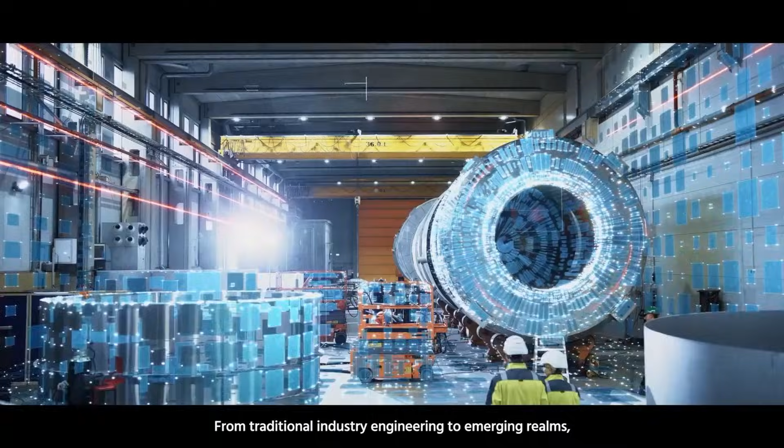From traditional industry engineering to emerging realms, from home appliances to heavy equipment, Bodor delves into the world of lasercraft. The brightest light shapes the dream from heart.

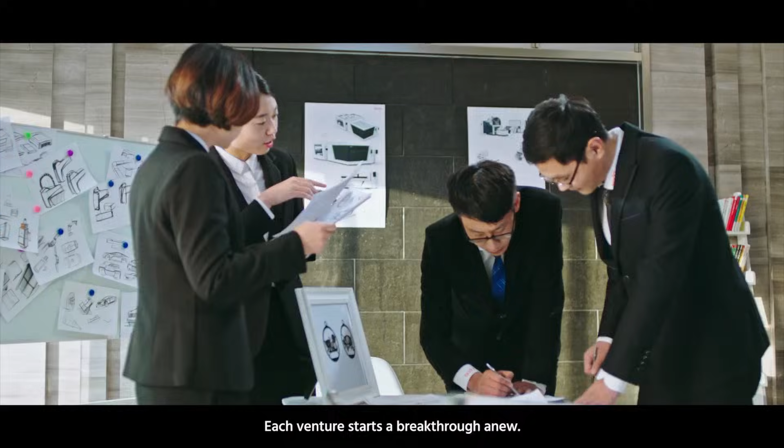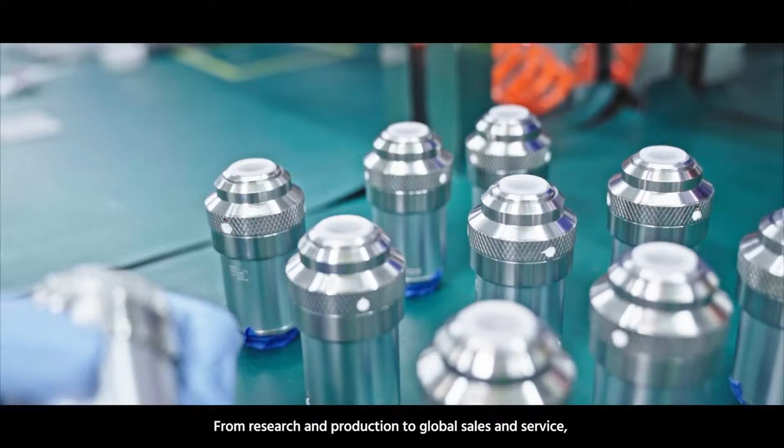Each venture starts a breakthrough anew. Since Bodor's inception in the laser industry, its course has been destined to infuse life and change. From research and production to global sales and service, Bodor focuses its strategy on laser cutting and welding machines.

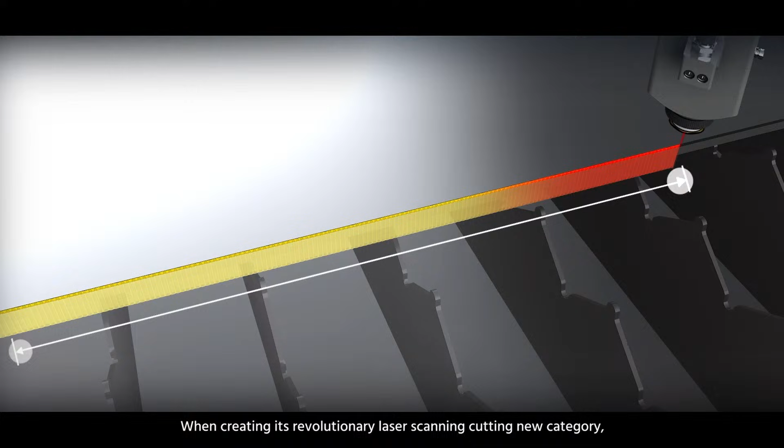When creating its revolutionary laser scanning cutting new category, the pioneering spirit on innovative technology takes the stage and brings fresh opportunities for industry growth. With multiple top global awards, Bodor's design is acclaimed, continuing to lead the industry trends.

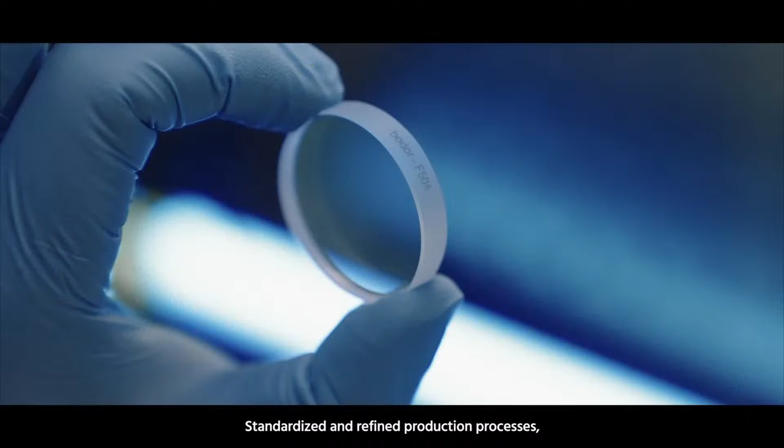Each stride pushes excellence forward. Through focused research on core optical components, the high-standard clean workshops achieve dust-free production of laser heads and laser sources. Standardized and refined production processes, along with quality inspection procedures, ensure consistent product performance.

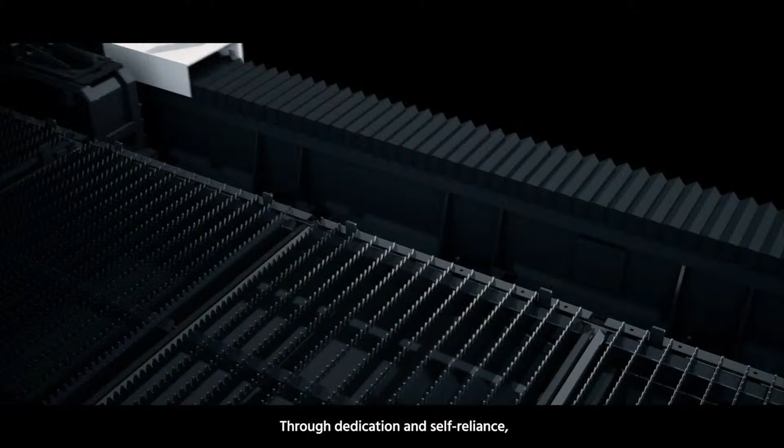Through dedication and self-reliance, Bodor leads in building a laser ecosystem with 6 self-developed core technologies. Through innovation and change, Bodor is always a step ahead.

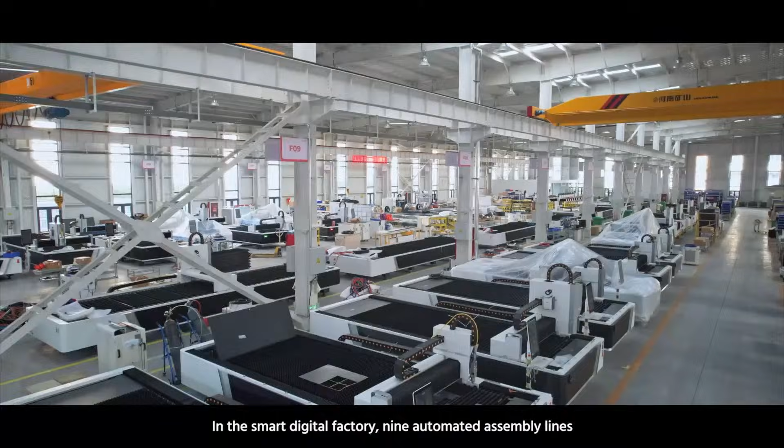In the smart digital factory, 9 automated assembly lines achieve standard and efficient production, delivering 1 Bodor laser cutting machine every 10 minutes.

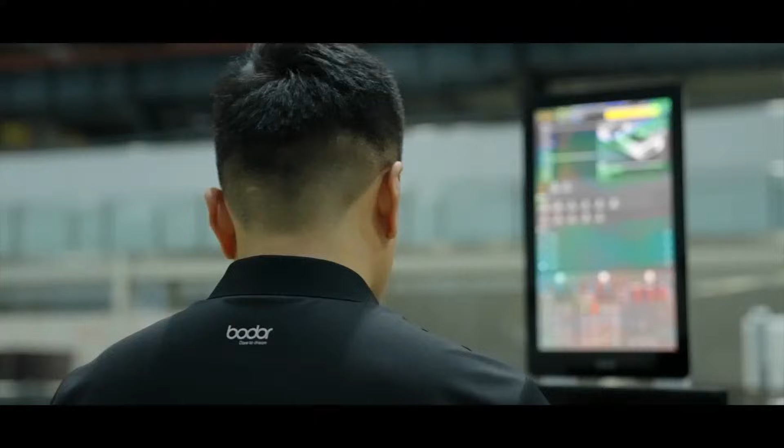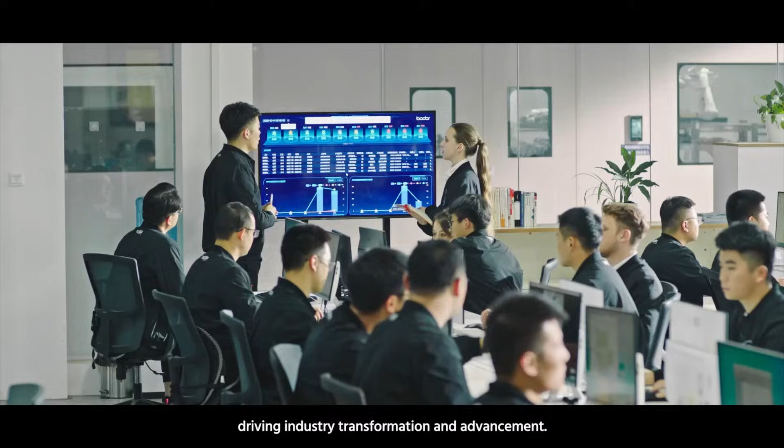Supported by world-class intelligent manufacturing systems and stringent quality management, Bodor is committed to offering top-quality products with no defects, driving industry transformation and advancement. At Bodor, craftsmanship and intelligent technologies make the excellent quality a consistent performance.

Bodor Laser Machine cut all the Tokyo 2020 Olympic and Paralympic symbols on the victory ceremony podiums. Each step aims towards tomorrow's best.

Bodor's global approach and high-level European standard attract top talents from around the world. In 180 countries and regions, its footprint reaches to hundreds and thousands of customers' plants to fulfill Bodor's belief in

paramount service. Bodor is committed to establishing a global service network. This ensures quick response times and professional service for global customers.

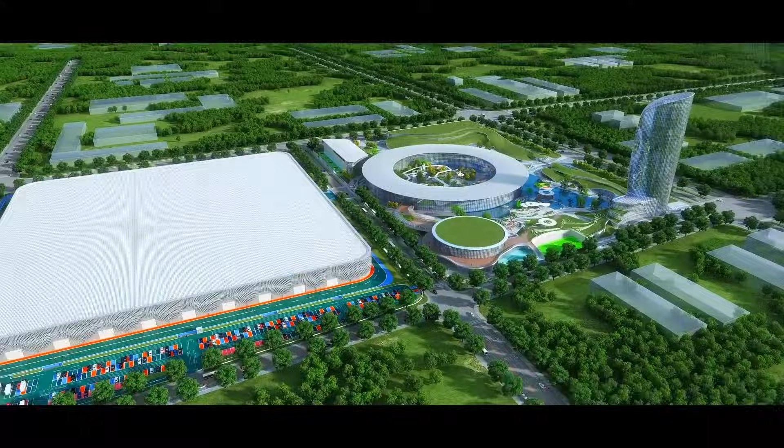At Dream Park, the future global headquarters of Bodor, spanning 300,000 square meters, a gathering place of diverse...

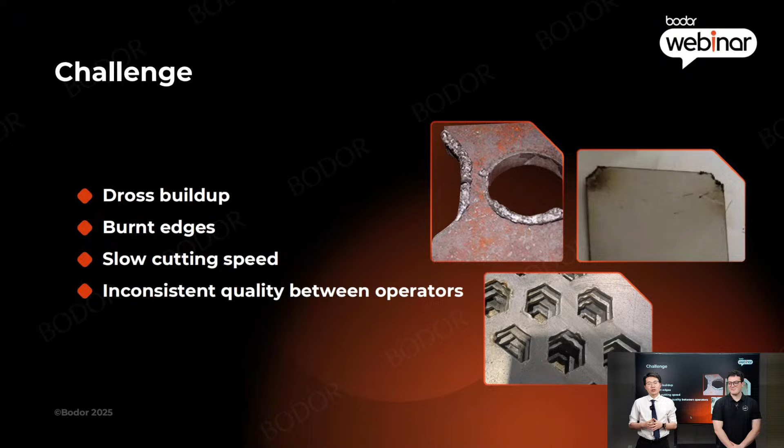So today we are going to fix everything up. We are going to break everything down, what really affects your cutting results, and how to dial in your settings step by step.

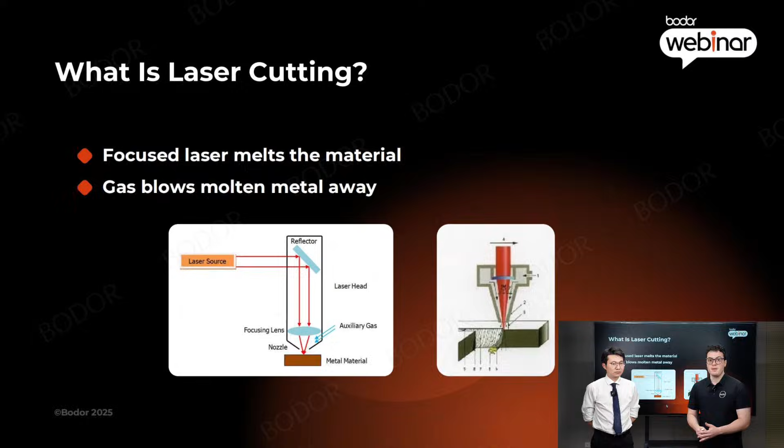Yes, sure. Imagine a laser beam as a tiny, ultra-precise blade, but made of pure light. When that beam hits the surface of the metal, the temperature jumps to 2000 degrees in a fraction of a second, and the metal melts or even vaporizes exactly along that path. At the same time, a high-speed jet of gas blows the molten material out of the kerf. That combination, intense light plus high-speed gas, is what gives you that clean, accurate cut.

Okay, so basically, the laser does the heating and the gas does the cleaning, right? Yeah, exactly. That laser gives you precision, and the gas keeps the edge clean and smooth. And because the beam never physically touches the metal, there is no tool wear and no mechanical deformation the way you might see with traditional cutting methods. That's very amazing, laser is like a blade made of light, right?

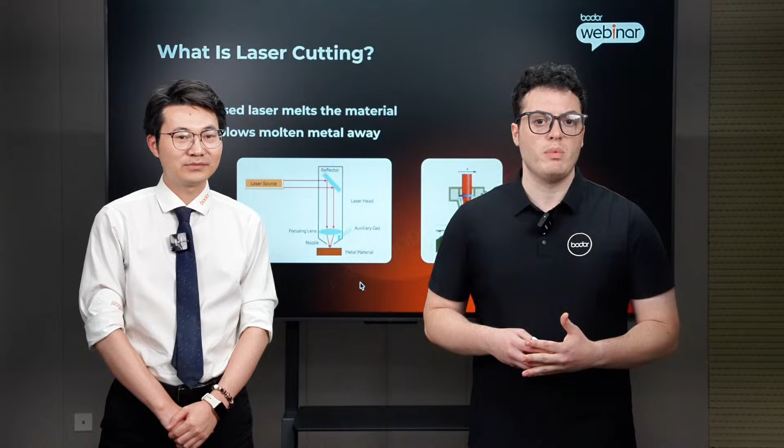Let's look at the two main types of laser cutting. Yeah, I remember fusion cutting and also oxygen cutting, right? Yes, let's start with fusion cutting. That's where the laser melts the metal, and nitrogen or clean air blows the molten metal away. Since the gas doesn't react with the metal, the cut surface stays clean, shiny, with no oxidation. Got it, perfect for stainless steel, aluminum, and titanium.

So what about oxygen cutting? Oxygen cutting, on the other hand, works almost like adding a flame boost. The laser preheats the surface, and then oxygen reacts with the hot metal. The reaction releases extra heat, and that extra heat helps the laser cut faster through the metal. Okay, so oxygen basically makes the cutting faster.

And it's like giving the laser a turbo boost, right? Yes, that's why oxygen cutting is ideal for carbon steel - fast, efficient, and low gas cost. You can cut stainless steel with oxygen too, but the edge will be darker and rougher because of the oxidation. So in most cases, we still recommend oxygen mainly for carbon steel.

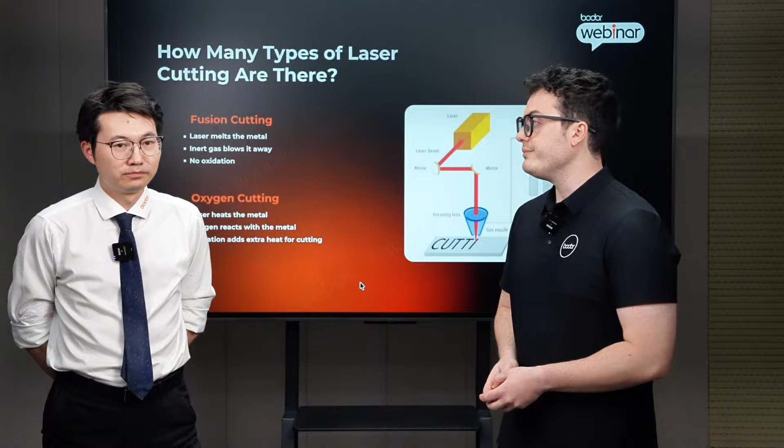To sum up, oxygen for carbon steel and nitrogen for stainless steel and aluminum. Yes, that is the key difference. Okay. Now let's move on, from how it works to how you control it.

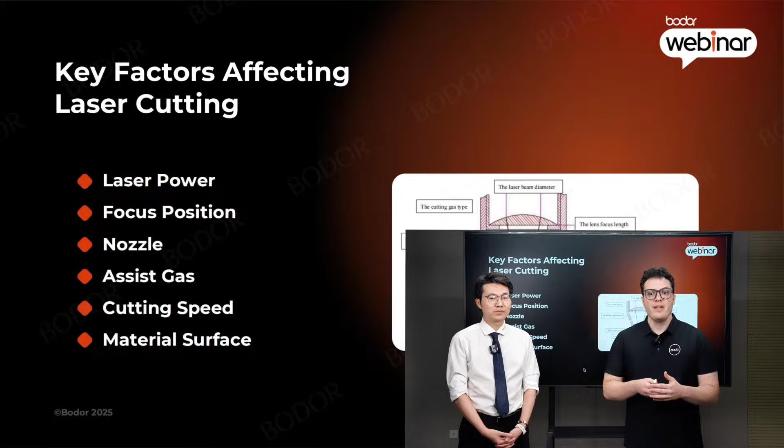The cutting parameters - first up is laser power. Laser power is simply how much energy you deliver into the metal. Take a look at the screen.

On the left, you can see what happens when the power is too low. The beam does not fully press through, and you end up with an incomplete cut. In the middle image, the power is too high. The metal overheats, the kerf becomes wider, and the edge turns rough and over-melted.

On the right, you see the result when the power is set correctly. A smooth, shiny edge with no dross.

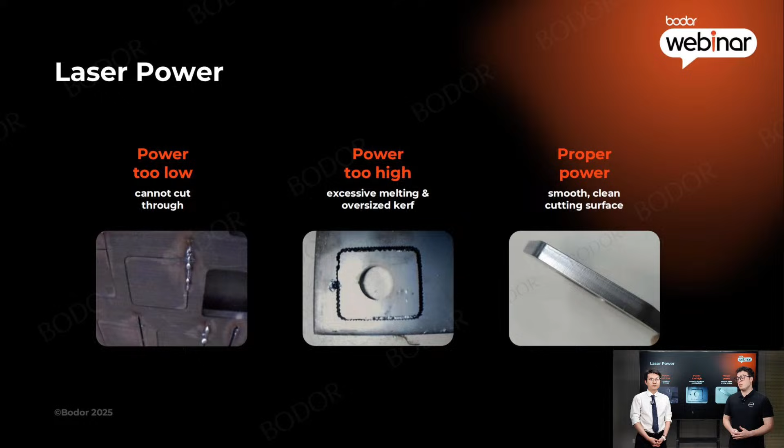Oh okay, I got it. And after power, I guess it's focus, right? Yes, the focus decides where that energy is concentrated inside the material. If the focus is too high, the energy spreads before it reaches the core of the sheet, and the penetration becomes poor. If the focus is too low, you push the energy too deep, and you can burn or roughen the edge.

That sounds tricky to adjust manually by operators. Yeah, that's why Bodor machines use automatic height following. The system continuously adjusts the nozzle height for you, so the focus stays in the right zone, even if the sheet is not perfectly flat or the thickness changes across the plate. That means less manual fine-tuning and more consistent results from part to part.

Okay, that's more convenient. And I've seen a lot of users ask about positive, negative, and zero focus. So when do you use each one? Great question. Here's the simple version. Zero focus: the focus sits right on the surface of the material. Energy is distributed in a balanced way through the thickness. This is common for medium thickness plates and gives a very stable, clean edge.

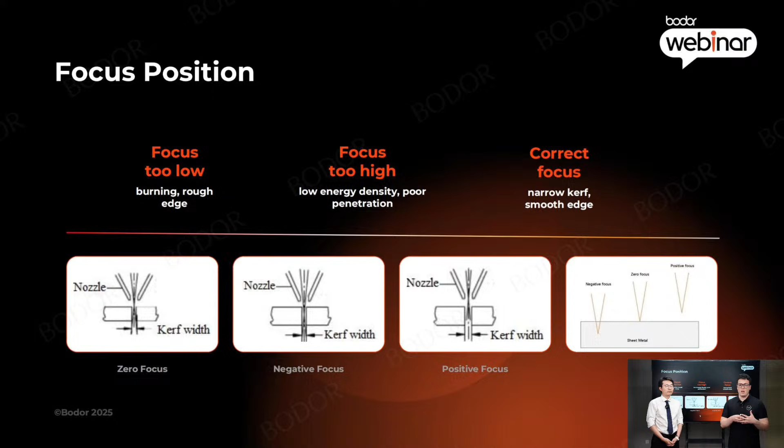Then negative focus. The focus point is inside the material. You get higher energy density deeper in the sheet. This is ideal for stainless steel and aluminum with nitrogen, giving a bright, clean edge and reducing dross. Okay, nice, but I think it's quite complicated.

I can sum it up. It makes sense, but does the focus position always change the energy density, and also change how the metal flows inside the kerf? Yes, exactly. You can think of it like aiming a flashlight, where you place the brightest spot completely changes the result.

Okay I see, that's a very good explanation. And speaking of machine adjustments, I always see operators switching nozzles and gas settings. Does this really make a big difference? Yes, a huge difference. The nozzle might look tiny, but it's critical.

It controls the gas flow that clears the molten metal. If the nozzle is dirty, worn, or damaged, your airflow becomes uneven, and even with perfect power and focus, your cut quality will suffer. And nozzle size also matters.

Yes, exactly, nozzle size matters a lot. Smaller nozzles create a faster, more concentrated gas jet, perfect for thin plates where you want a sharp, focused flow. Larger nozzles work better for thick plates where you need more volume of gas, even if the speed is a bit lower. The key rule is do not oversize the nozzle on thin sheet. With too large a nozzle, you can disturb the cut and even risk damaging the lens.

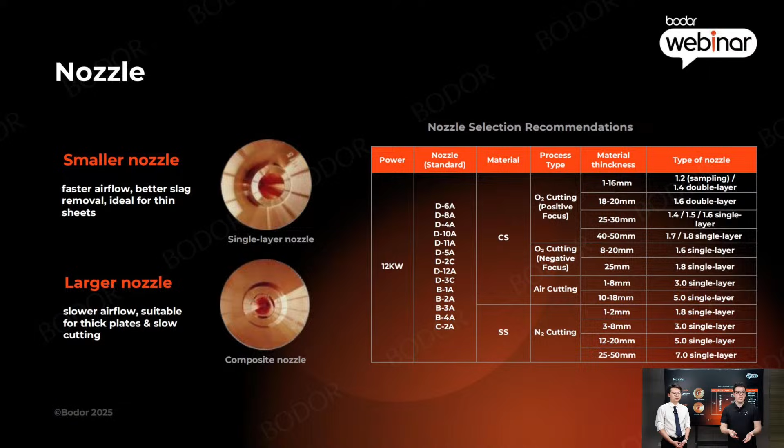So it's definitely not bigger, the bigger the better, right, for nozzle? Yes, exactly.

Now let's talk about the assist gas. It is just as important as the nozzle. For carbon steel, we usually use oxygen with a relatively low pressure for both piercing and cutting. For stainless steel, nitrogen is the common choice. And for thin carbon steel, stainless steel, or even some other materials, you can also use air.

The purer the gas, the better the cutting quality. So make sure your oxygen is at least around 99.9% pure, and your nitrogen is above roughly 99.9% if you want the very best results.

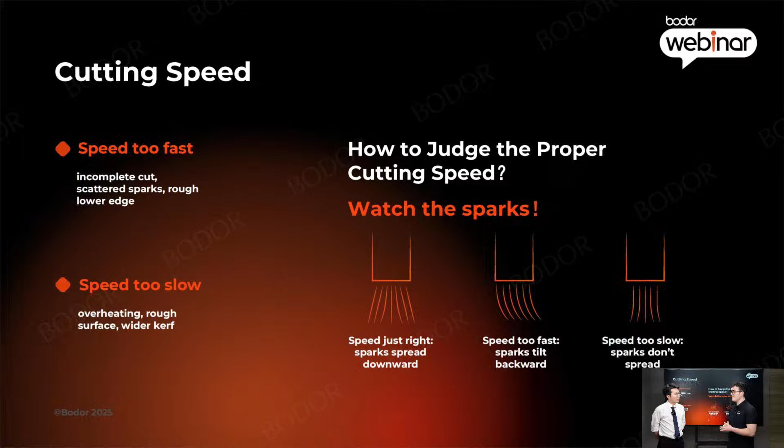The ideal situation is when the sparks flow evenly and smoothly, and the lower part of the cut has no molten residue. That is how you know the cutting speed is just right. Very good tips, very visual and practical. Thank you, Dennis. Thank you, Frank.

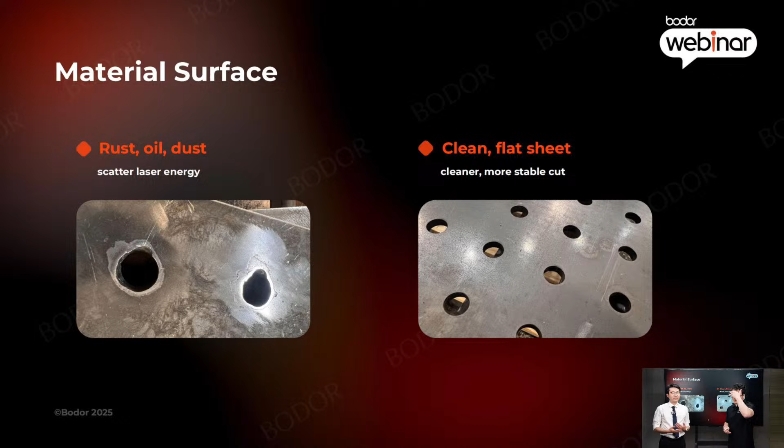And finally, remember that the sheet surface condition matters too. If it is rusty, oily, or dusty, laser energy scatters and the cut becomes unstable. So a clean and flat sheet equals a clean cut. Get all this right - power, focus, speed, gas, and material - and you will have a perfect, efficient cut every time.

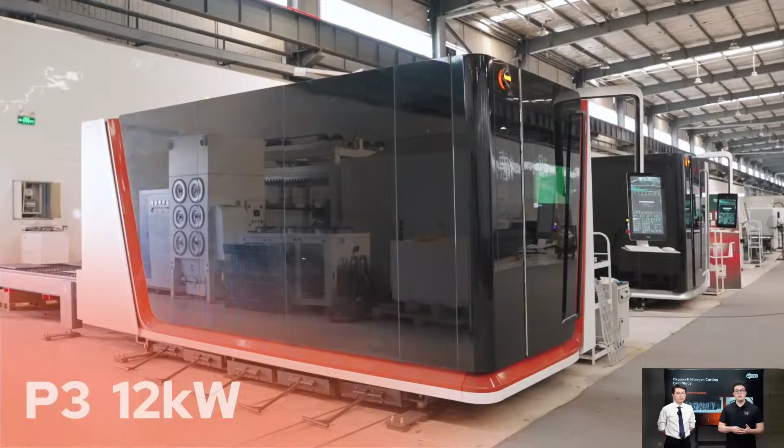And for today's live demonstration, we are using two configurations.

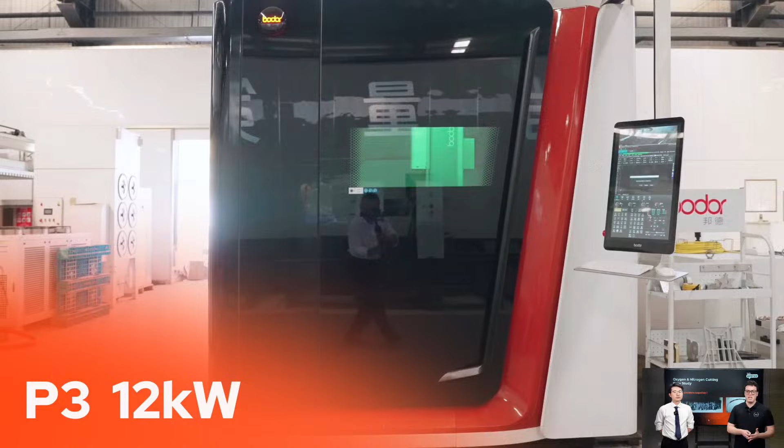For carbon steel and stainless steel, we are working with a 12 kilowatt P3. For aluminum and brass, we use a different setup.

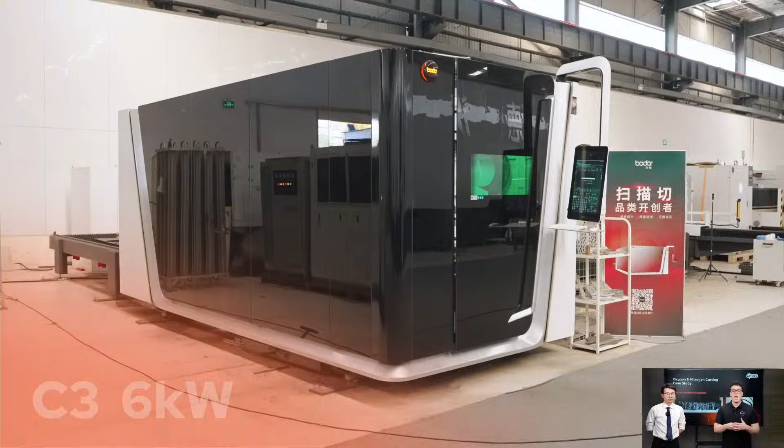For aluminum and brass, we are using a 6 kilowatt C series machine equipped with our scan cut laser head, which gives extra stability when we cut highly reflective materials like aluminum and brass. And as we go through each material and thickness, we will also walk you through the recommended parameter settings, so you can see exactly what works well in real production.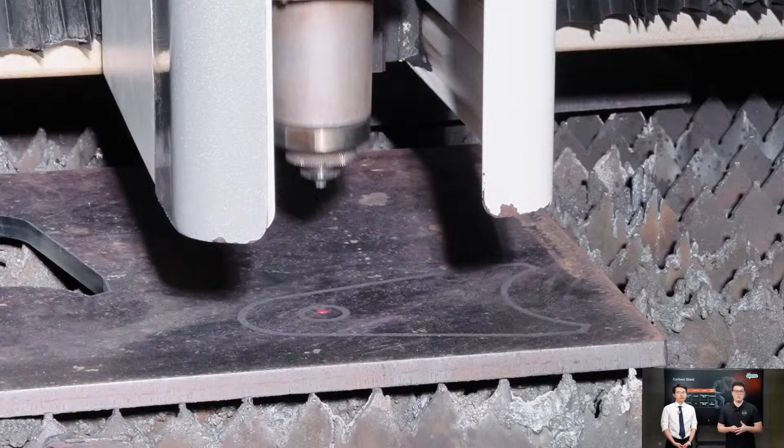Right now, what you are seeing on the screen is a 16 millimeter carbon steel plate cut with a positive focus. For this cut, the focus position is set to about plus 14. We are using oxygen as the cutting gas and a single layer nozzle with a diameter of roughly 1.4 millimeters. These settings give you stable cutting performance on thick carbon steel.

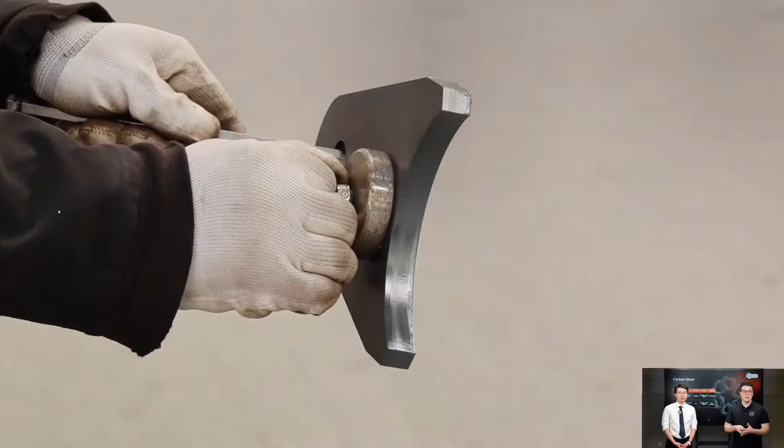Take a look at the sparks, falling straight down, clean and steady. That is exactly what you want to see. When the sparks drop vertically like this, it means your parameters are dialed in correctly. Good piercing, a clean curve, and a bright, smooth edge.

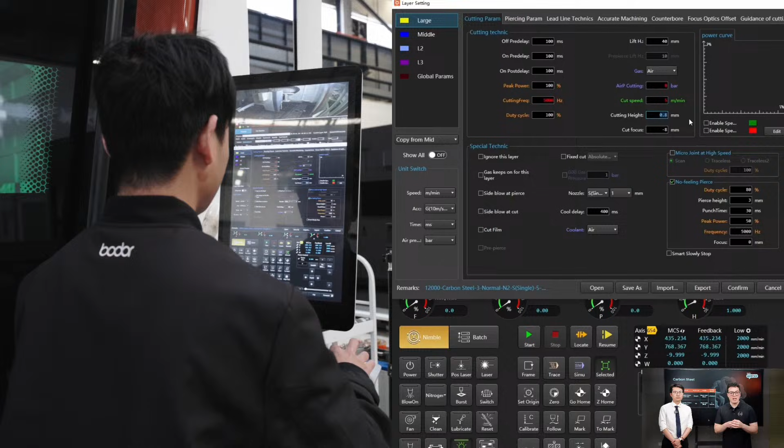Now let's switch to a thinner plate, a 10 millimeter carbon steel sheet. It is the same material, but we are changing one key parameter: the focus. Here we are using a negative focus set to about -8, and we are switching to air cutting with a single layer nozzle of roughly 5 millimeters in diameter. With this setup, the cutting speed is in the range of about 5 to 7 meters per minute.

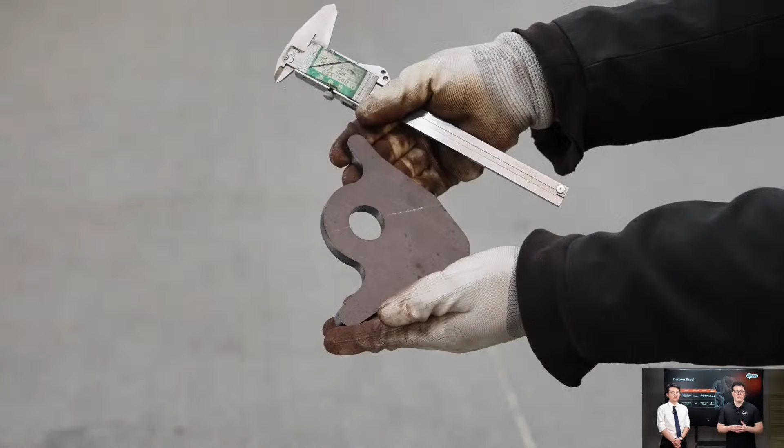Take a look at the sparks. They are shorter and more concentrated now. That is exactly what negative focus is supposed to do. By pushing the energy deeper into the plate, the molten material is cleared out faster. And look at the edge: bright, clean, with almost no dross at all. That is a very solid result for 10 millimeter carbon steel using air cutting.

Okay, moving on. Now it is time for stainless steel. I know many of you cut stainless every day, so this one is definitely for you.

We are working with a 10 millimeter stainless steel sheet, and this time we are switching to nitrogen as the cutting gas. Why nitrogen? Because it keeps your edge clean, bright, and free from oxidation. No burn marks,

No dark edges. For this cut, we are using a negative focus set to around -10, a single layer nozzle of roughly 5 millimeters in diameter, and nitrogen as the cutting gas.

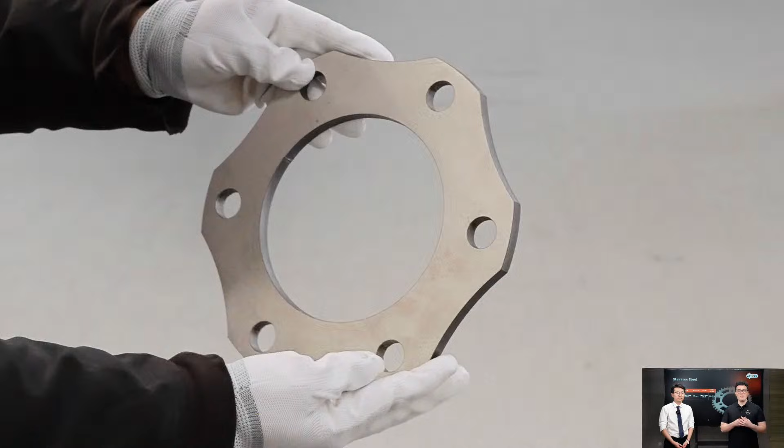Take a look at this edge. See how smooth and shiny it is? That is exactly what you want when you are making decorative panels, kitchen equipment, elevator components. Anywhere the appearance really matters. Yeah, it's very common in our daily life.

We are running at around 6 to 8 meters per minute. And if you look at the sparks, they are smaller, tighter, very controlled. That is the perfect sign of a stable nitrogen cut. It's very beautiful and looks like a mirror finish.

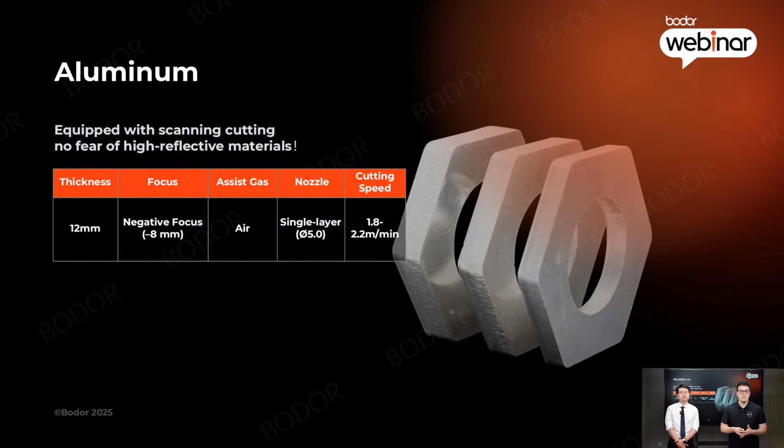All right, now let's move on to something a bit more challenging: aluminum. Aluminum looks beautiful when it's done right, but it's also one of the trickiest materials to cut. We are working with a 12 millimeter aluminum sheet, and for this demonstration we are using a 6 kilowatt C-series machine equipped with a scan cut laser head, a single layer nozzle of about 5 millimeters in diameter, a negative focus of roughly -8 millimeters, and air as the assist gas.

For aluminum, the combination of air and scan cutting is a great choice, especially because aluminum reflects a large amount of laser energy. Keeping the focus stable and the gas flow clean is absolutely critical to getting a crisp edge without burn marks.

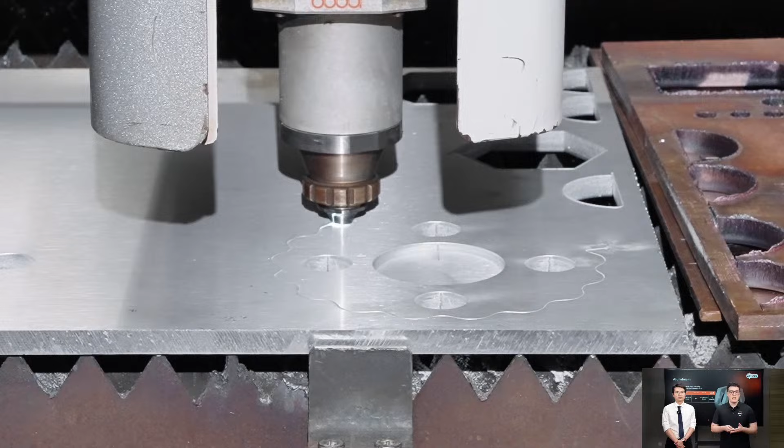Take a look at the sparks, see how they are shorter and wider? That is a sign that the reflections are being handled well. And look at the edge, bright, clean, with no burns at all. That's really satisfying to watch.

For aluminum and other reflective materials, it's common to say these materials can do very huge damage to our laser source. The scan cut laser head is technology innovated by Bodor Laser, designed to solve the problems of cutting reflective materials like aluminum. So when we combine air with the scan cut laser head, you get very smooth and bright cutting results on aluminum.

Once everything is tuned correctly, the laser basically glides through. Here's a quick tip: when cutting reflective materials like aluminum, make sure your protective lens is spotless. Any reflection or dust can throw off the beam, and that's something you definitely want to avoid.

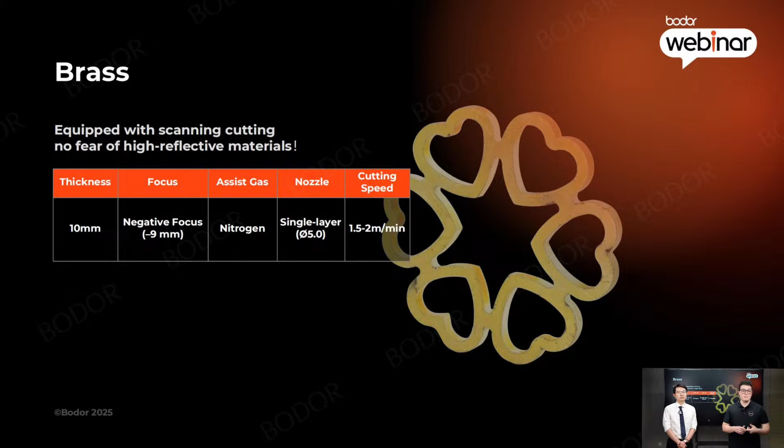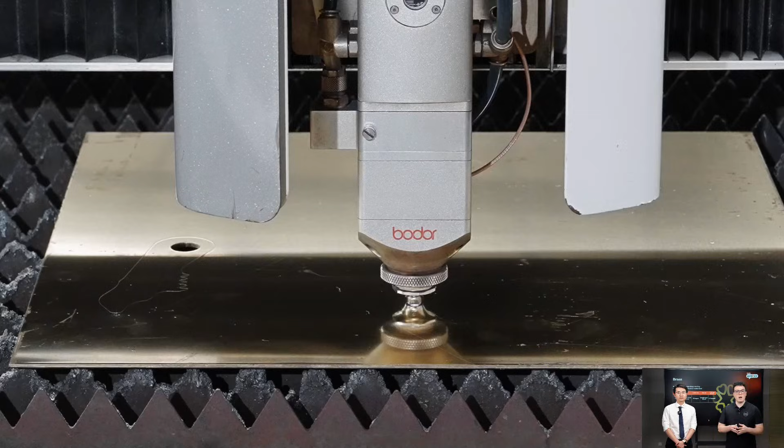This one is always a crowd favorite, shiny, smooth, and full of color. We are cutting a 10mm brass sheet using the same 6 kW setup with the scan cut laser head, a single layer nozzle of roughly 5mm in diameter, a negative focus of about -9mm, and nitrogen as the assist gas. Brass under a higher power laser always looks stunning, especially when scan cutting is handling that highly reflective surface.

Watch the sparks, see that bright golden glow? That is no camera lighting, that is pure brass reflecting the beam. You can already tell it is going to be a beautiful cut.

As we move along, watch the edge: clean, golden, crisp. No oxidation, no burns, no burn marks, just the premium finish brass is known for. Wow, that looks really gorgeous on camera.

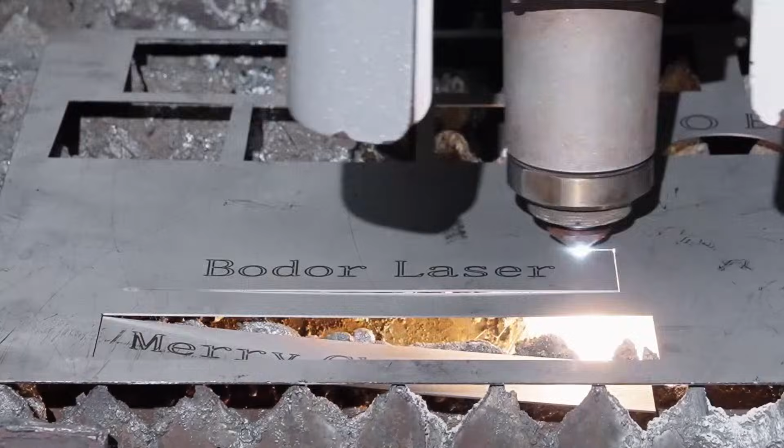Amazing! Next up, countersinking. This process uses the laser to create a small recess or depression on the surface. It is mainly for screw or nut installation, so the connection surface stays smooth and perfectly flat. And it actually solves a lot of real problems in sheet metal assembly. No more screw holes sticking out, no more uneven surfaces, no more scratching or snagging.

And also countersinking is one of these simple but incredibly useful processes. Its applications are everywhere in real production. For example, you can use it for screw seating or nut installation, so the fasteners sit level and flush with the surface. It's also great for flush mounting, assembly preparation, and precision component fitting. Anytime you need the connection surface to stay smooth and clean.

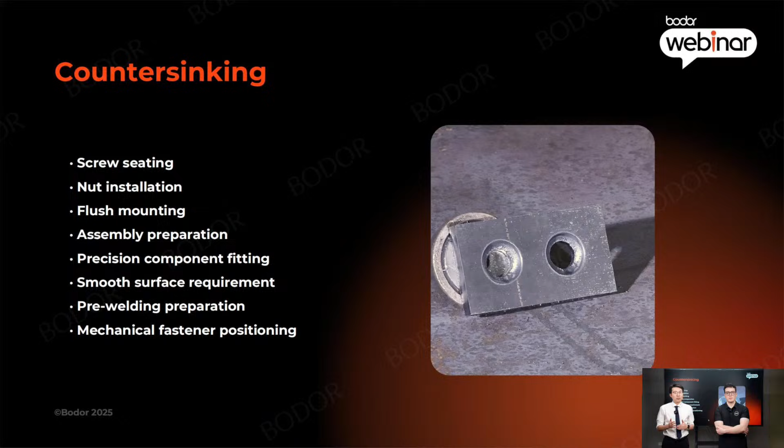And also in fabrication, countersinking is often used for pre-welding preparations and mechanical fastener positioning, making the next process faster and more accurate. So even though the features look small, the impact on assembly quality is huge. It also adds to part alignment, and it makes the next steps, like bending, welding, or handling, much easier.

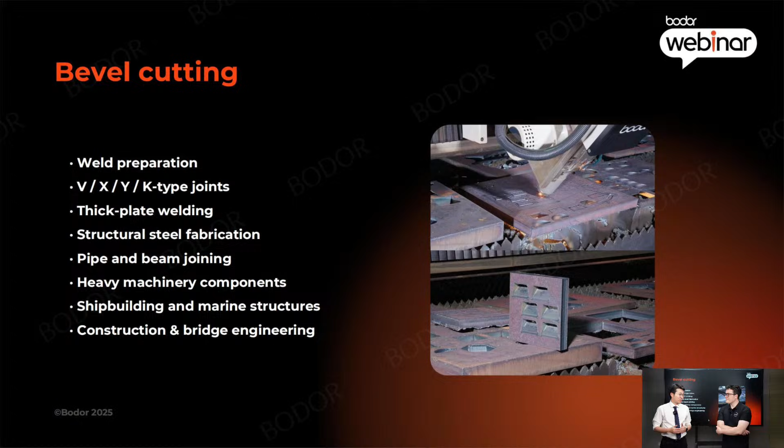And you can also find bevel cutting in heavy machinery components, shipbuilding and marine structures, and even construction and bridge engineering. So once you have bevel capability, your fabrication shop can take on much bigger projects with higher precision and stronger joints. And it actually solves a lot of welding and fabrication problems.

And look at that, a perfect bevel, smooth edge, no rework required. That is serious productivity.

Now let's switch gears a bit. This is air cutting. Instead of using oxygen or nitrogen, we are using compressed air as the gas. The idea is simple: reduce cutting cost while keeping good cutting speed and quality.

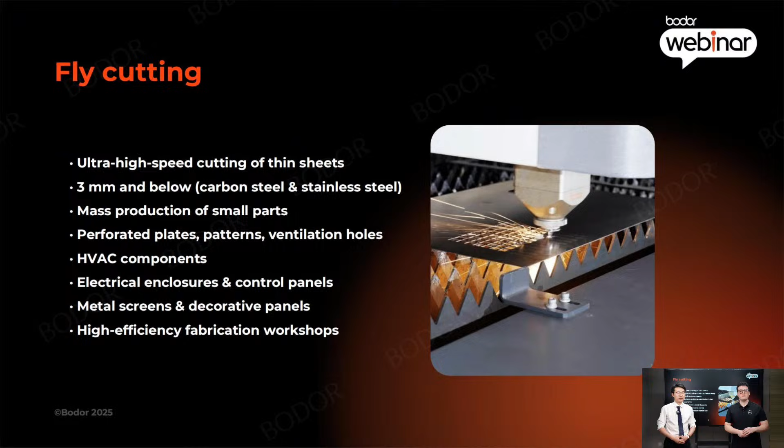It's also ideal for perforated plates, decorative patterns, ventilation holes, and all kinds of repetitive shapes. Industries like HVAC, electrical enclosures, control panels, metal screens, and decorative panels use fly cutting all the time because it's fast, convenient, and incredibly efficient. So if your production relies on high-speed, thin sheet cutting, fly cutting is a game changer.

Yeah, and it solves several big productivity problems. You eliminate constant start-stop motions. You avoid slow acceleration and deceleration, and you get much faster cutting for repeated small shapes. It also reduces heat build-up and lowers the cost per part in batch production.

You will notice the motion almost looks like the machine is dancing, and the cutting speed is incredibly high. Look at it. Look now.

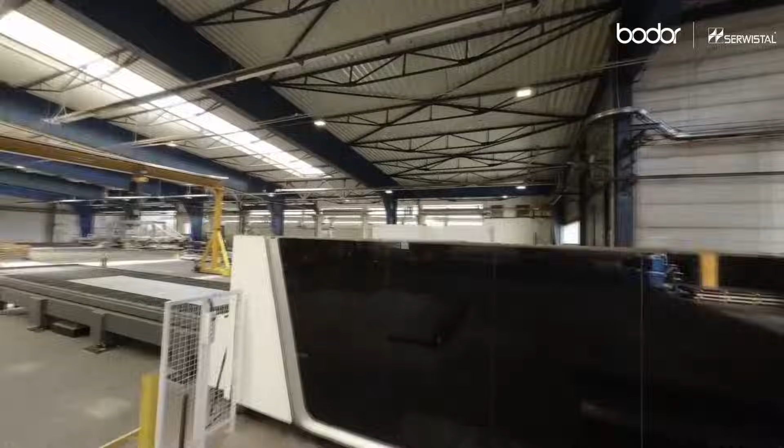At the moment, we have 6 fiber lasers, 2 of them come from Bodor. The first one, P12, was fully installed in 2024. The second one, P6, with working table 2 by 6, but with the iTrans system, is already during the installation process.

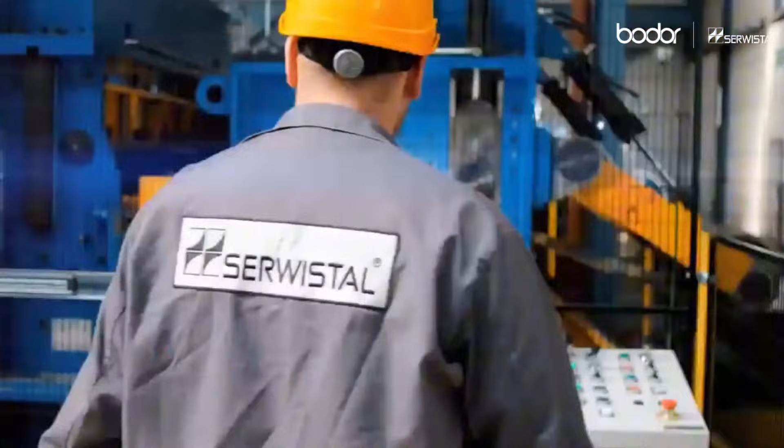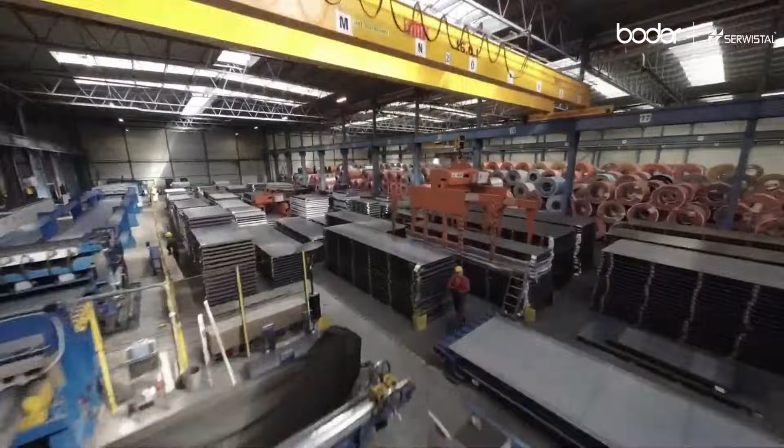My name is Piotr Wysocki. I'm director of Serwistal Metal Forming Center. Serwistal is the biggest independent steel service in Poland. As a company, we deal with processing of flat products, strips and sheets, cut to precise size in accordance with individual needs of our clients. In 2023, we analyzed the market needs, and with a decision of our board and president, we decided to invest in a machinery park for additional processes like laser cutting, bending, and forming, etc.

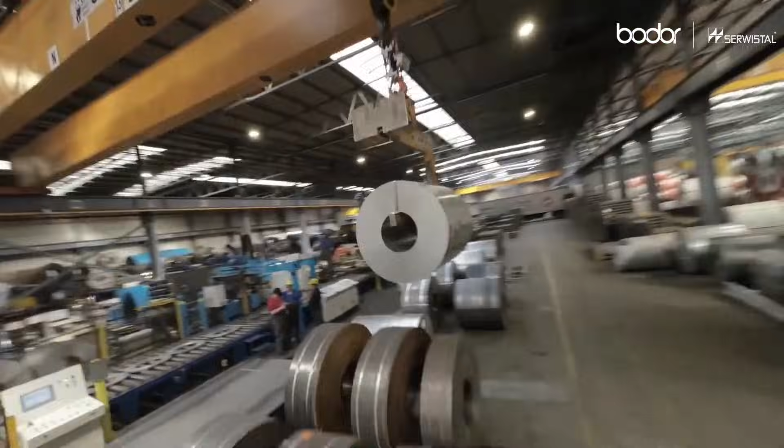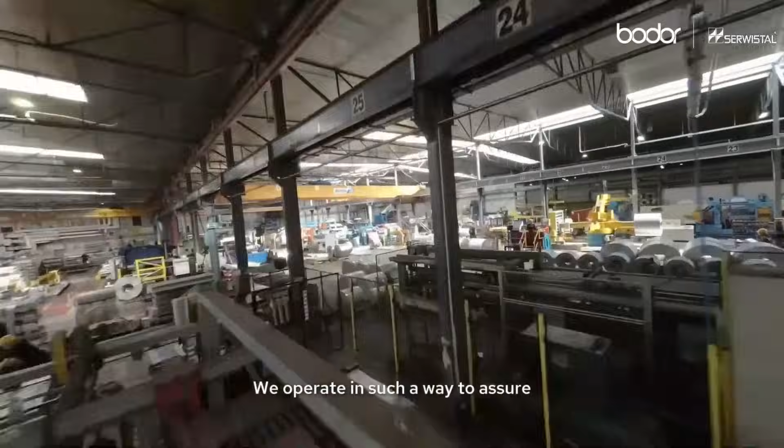For over 2 decades, we have been efficiently executing even the most challenging orders from our clients. The business strategy of Serwistal is building and maintaining long-term relations with our customers. We operate in such a way to assure that every client, regardless of scale, has the feeling of safety and satisfaction in cooperation with us.

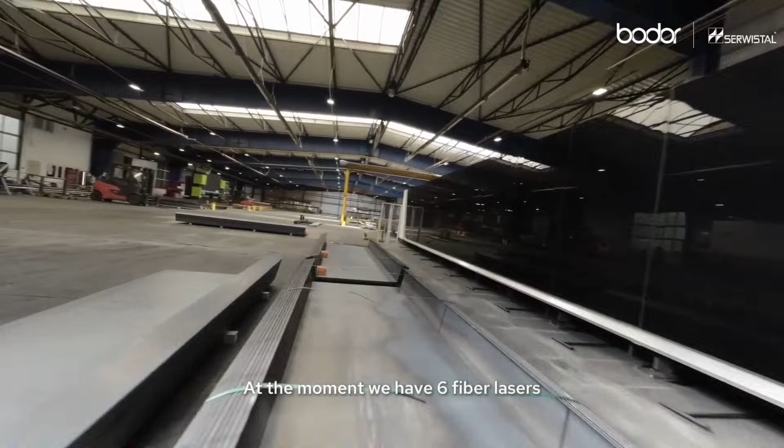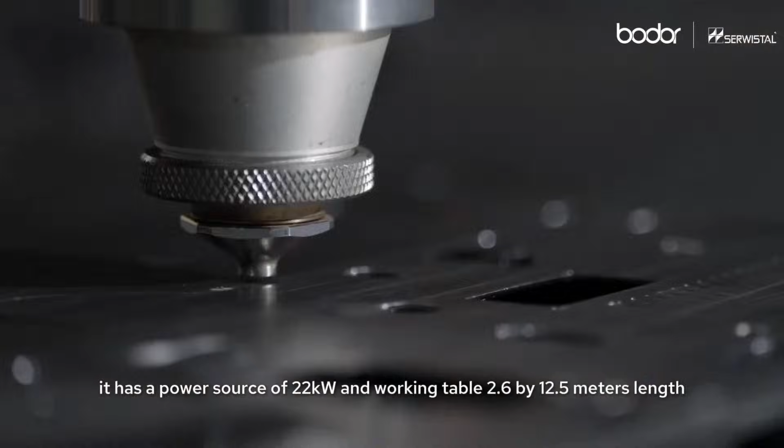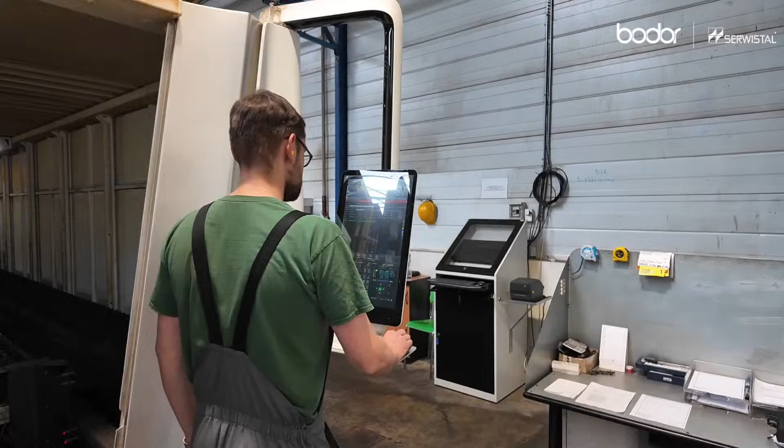At the moment we have 6 fiber lasers, 2 of them come from Bodor. The first one, P12, was fully installed in 2024. It has a power source of 22 kilowatts and working table 2.6 by 12.5 meters length. The second one, P6, with working table 2 by 6, but with the icon system, is already during the installation process. That would be the first one in our factory with a bevel head inside of it.

After the visit in China, where we had the opportunity to see for ourselves how Bodor deals with production, responds to individual customer needs, and what's most importantly, potential for growth.

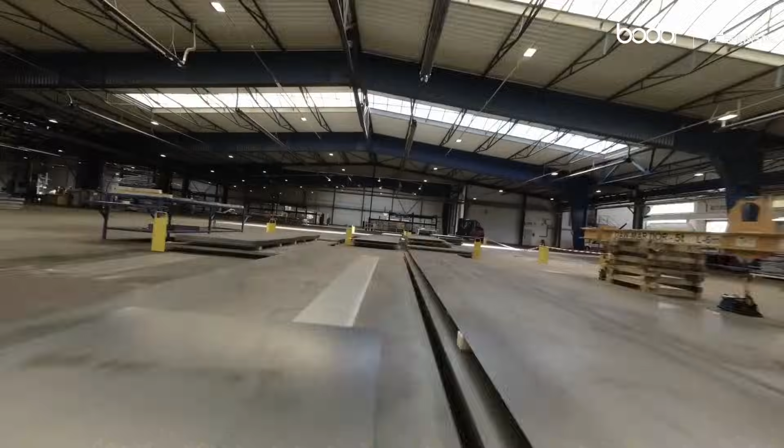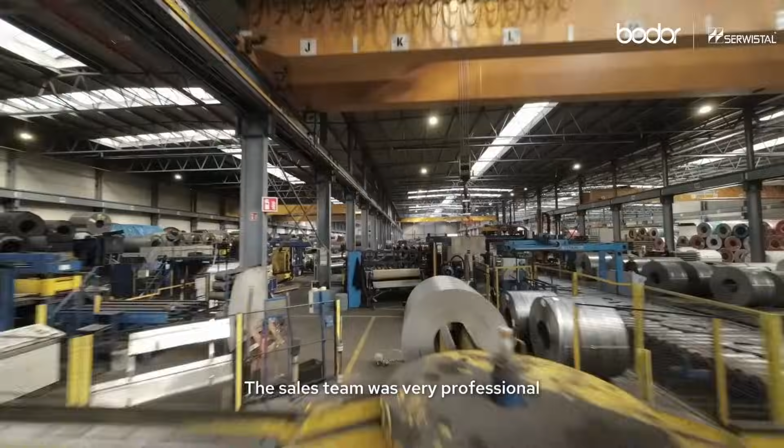Overall, I am satisfied with the Bodor Laser service. The sales team was very professional during the negotiations. The after-sales team was very responsible and helpful. A bit more proactive follow-up after the installation process would be helpful, but I'm generally pleased with the experience.

My wish is for a long-term partnership with Bodor, including regular software updates, update options for existing machines, and feedback sharing.

Bodor, Dare to Dream. That's a great video, right? Yeah, it's always inspiring to see real factories using Bodor equipment day after day.

What really stands out is the stable quality during long cutting runs, the speed boost compared to their previous machines, and the precision they achieve even on complex parts. And of course, easier daily operation and real savings in gas, labor, and maintenance. That's what every factory wants. A big thanks to our customer from Poland, Serwistal team, for sharing their story.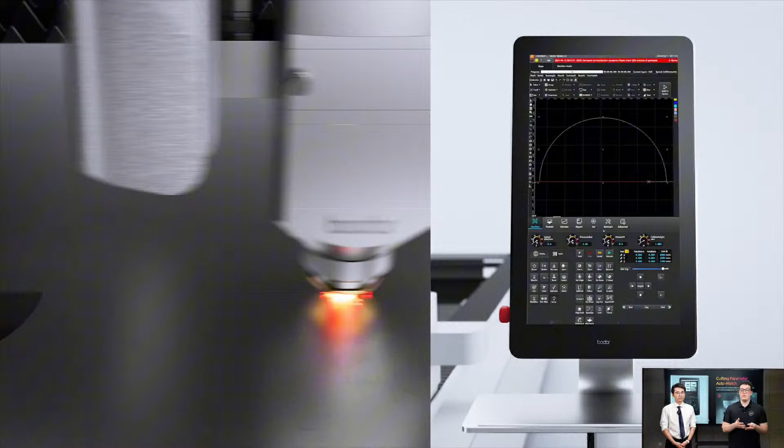It's actually pretty simple. All Bodor machines come with smart parameter auto-match. During cutting, this automatically recommends the best settings based on your material and thickness. So even if you're new, you can start cutting right away with sensible parameters. No guesswork, no long trial and error loops, just fast and accurate setup every time.

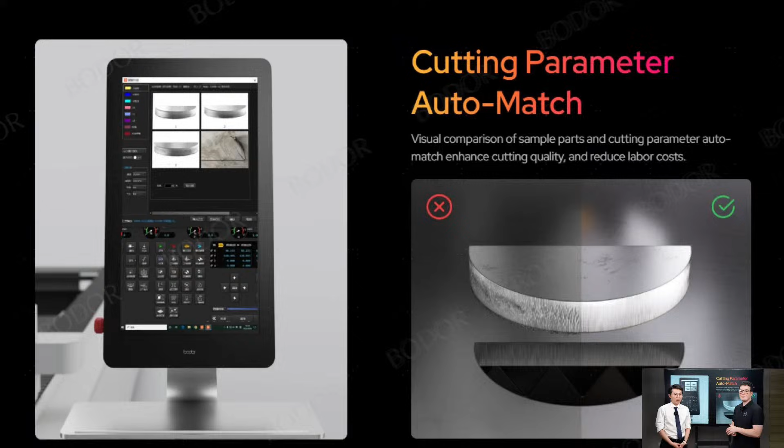That's very impressive. Another interesting one from the chat: how do you keep small parts from tipping, moving, or falling during cutting? Great question. That is exactly why Bodor developed nano joint technology.

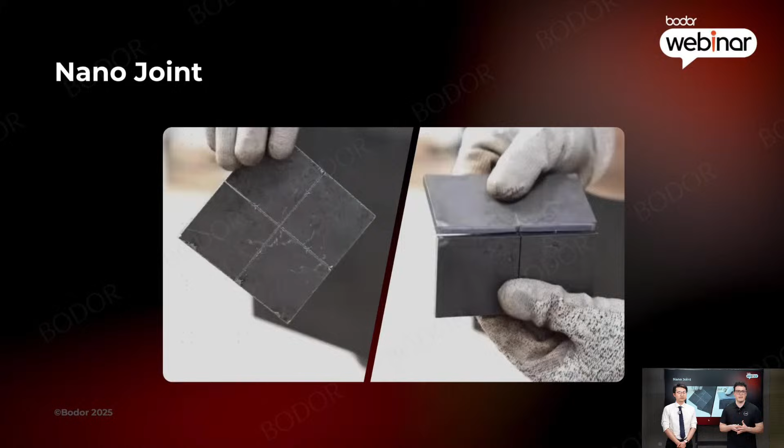Nano joint technology: instead of cutting the part out completely, the machine automatically leaves tiny, traceless micro connections. They are almost invisible, but strong enough to keep the parts stable, so they won't tilt, pop up, or hit the cutting head. That's really clever — no more parts flying around and causing collisions.

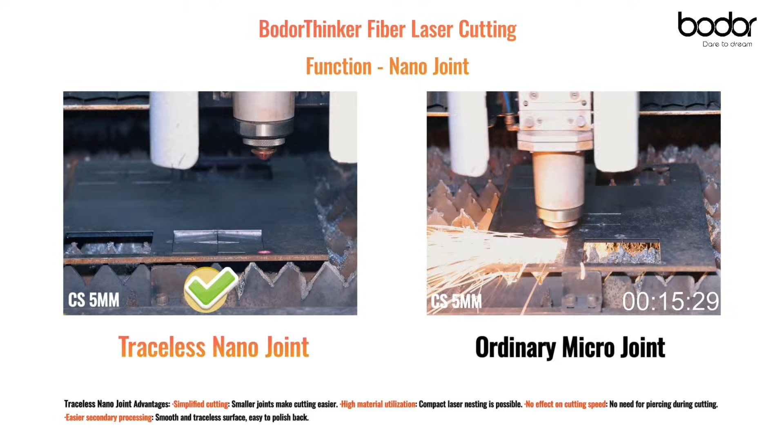Exactly, and because the joints are very tiny, the edges stay clean. You can remove the parts easily afterward, usually without any extra grinding or polishing. This is especially useful for thin sheets, small parts, and precision components, where even a small collision or movement could ruin the workpiece or stop production.

I've seen another question in the comments: how do I know if my cutting speed or focus position is correct? I think you've just explained that before.

Here's a very simple trick: watch the sparks and check the cut edge. If the sparks drop smoothly down and the edge looks clean, you are in the good zone. If the sparks scatter, tilt, or the edge shows dross or burning, then it's time for some fine-tuning of speed or focus. That's very super practical. Let's move on — here's another big one: warranty.

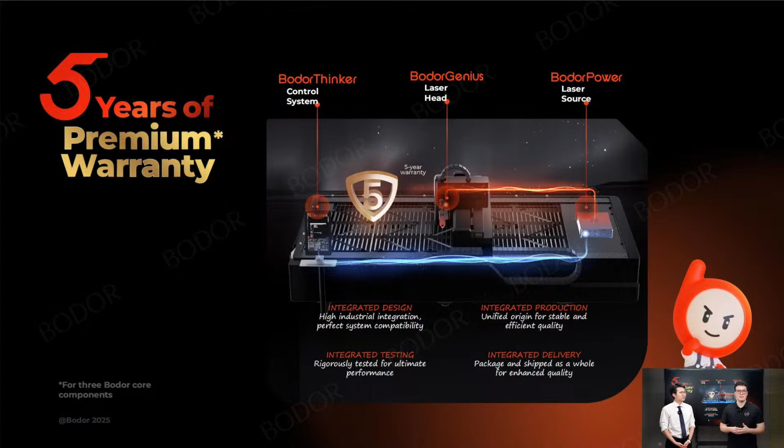All three core components of Bodor machines come with a 5-year warranty, so you can cut with confidence and focus on production. On top of that, our engineers provide 24/7 after-sales support to help you minimize downtime and keep your operations running smoothly.

So to recap, today we explored the basics of laser cutting, how real parameters work on actual materials, and how to make your laser cutting smarter, faster, and more consistent. That is what Bodor is all about — making advanced laser technology easier and more efficient for everyone.

dreams, boundaries are removed, and ideas are inspired. Bodor will build a pivot for the laser application of tomorrow, and the largest laser cutting and welding equipment production base will rise. Bodor is clear that it is a time for steering the course.